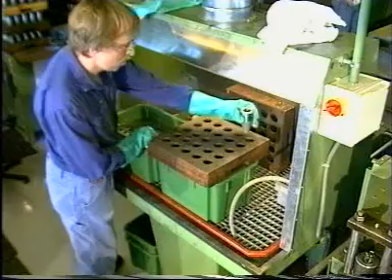All spindle guides are function tested before they are delivered.

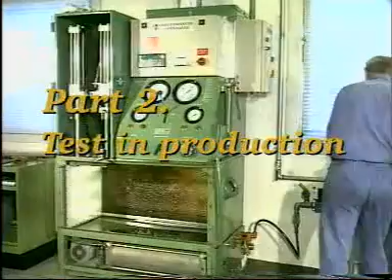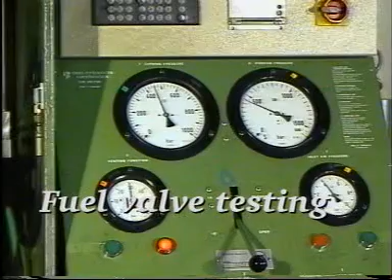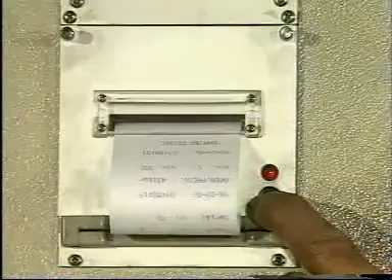All fuel valves are assembled and function tested before leaving the workshop. Overhauled fuel valves or fuel valves taken from stock must be function tested before they are mounted in the cylinder cover. The pressure testing pump is equipped with pressure gauges for displaying opening pressure, working pressure, venting function, and air inlet pressure.

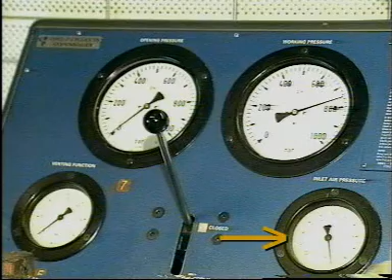Position the fuel valve in the test rig. For guidance on how to operate the pressure testing pump, refer to the supplier's special instructions.

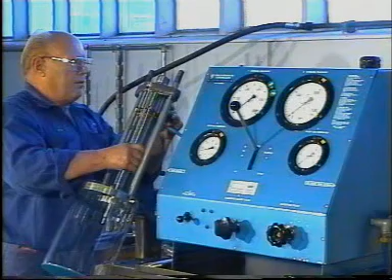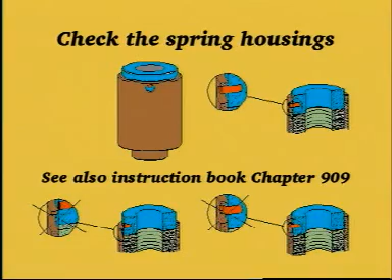To ensure that over-tightening has not taken place, check that the locking and indicating pins have not been bent or broken off. In the event of over-tightening, mount a new spring housing.

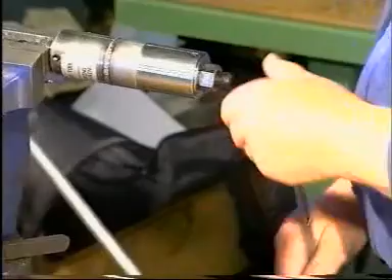A very important element in the correct functioning of the fuel valve, both during testing and in service, is ensuring that the spring housings apply the predetermined tightening force. To ensure that this force is present, a special tool has been designed to check the calibration of the spring housings. We recommend that the calibration of new and especially old spring housings be checked before they are mounted on the engine or on the fuel valve test rig.

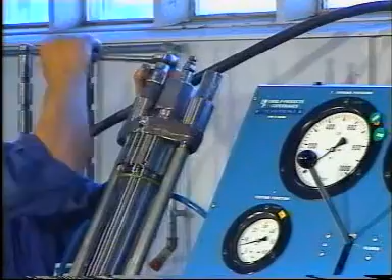Tighten the nuts until the top face of the pressure disc is flush with the top face of the spring housing.

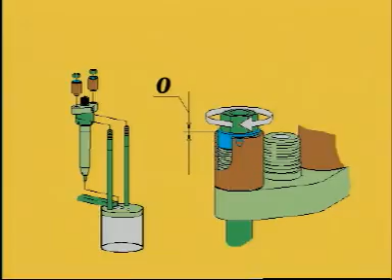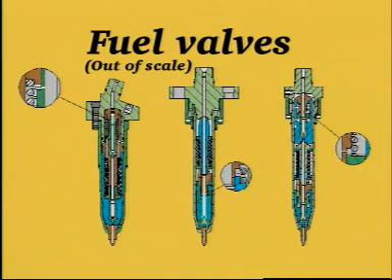Fuel valves are available in 3 different designs depending on engine size. Refer to your instruction book to see which valve is to be used on your engine. The pressure testing procedure is the same for all types of valve.

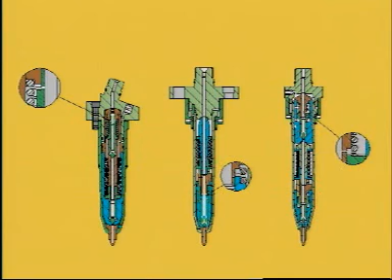Slowly fill the valve by pumping at low pressure until fuel oil, without air bubbles, flows from the fuel oil return pipe. Raise the pressure until it is above the opening pressure.

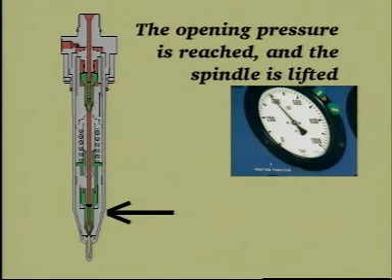Flush the valve for about 5 seconds.

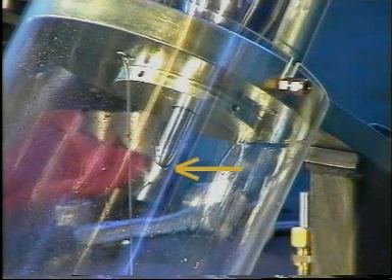There will always be a certain amount of fuel oil flowing from the fuel oil return pipe when the fuel valve is full of fuel oil and pressurized. Fuel oil must not seep from the fuel valve nozzle holes until reaching a pressure of 50 bar below the specified opening pressure. If the fuel oil does seep from the fuel valve nozzles, see Instruction Book, Volume 2, Chapter 909.

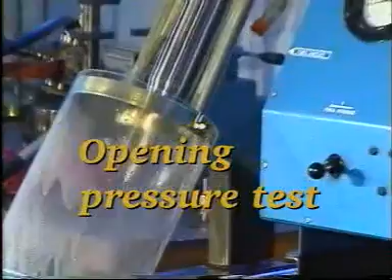Pump 5 to 10 strokes to fully open the valve and to blow out any dirt. Then relieve the pressure.

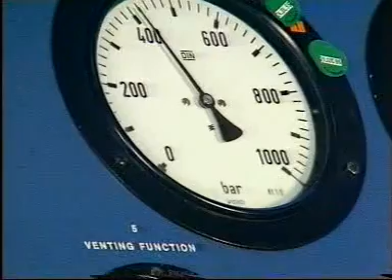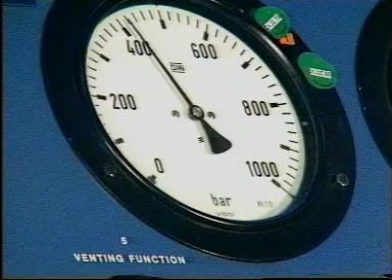Slowly increase the pressure until fuel oil is emitted from all the atomizer holes. Read the actual opening pressure on the pressure gauge marked opening pressure. Compare the actual opening pressure with the pressure specified in the Instruction Book, Volume 2, Chapter 909, and, if necessary, adjust the pressure by inserting or removing discs.

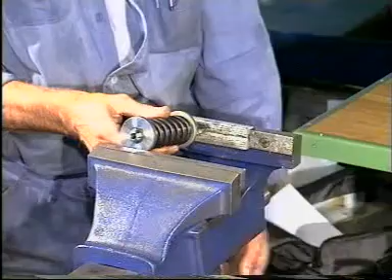Set up the thrust spindle in a bench vise with soft jaws. Compress the spring for the thrust spindle to remove the tension on the circlips, and then remove the circlips.

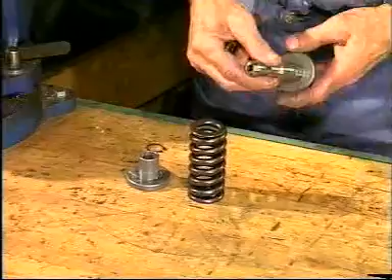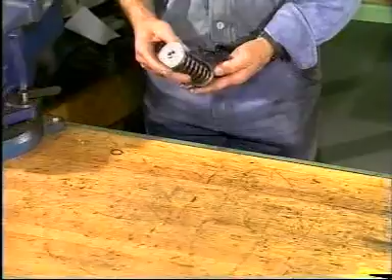Do not insert more than 5 extra discs when adjusting the pressure. The sum of the pressure markings on the extra discs must not exceed 150 bar. The fuel valve must be retested after any adjustment.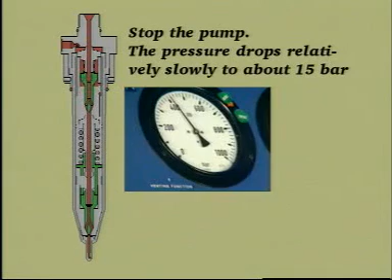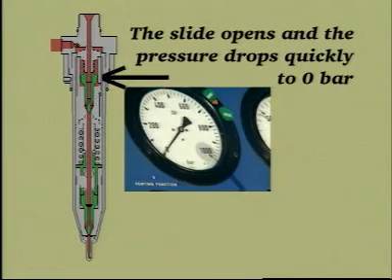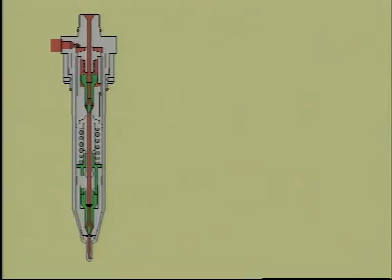If the quick pressure drop cannot be registered, the slide is sticking, or the hole is blocked, disassemble and examine the parts, replace if necessary.

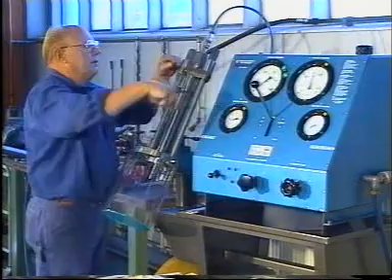Slowly fill the valve by pumping at low pressure until fuel oil, without air bubbles, flows from the fuel oil return pipe. Remove the fuel oil return pipe and block the outlet hole with a gasket and a plug screw.

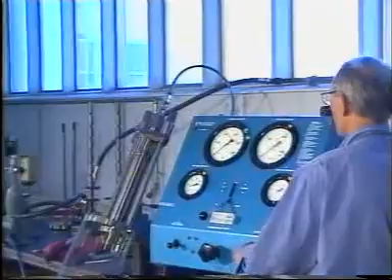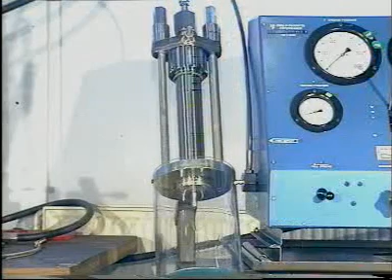Increase the pressure to about 100 bar and move the control handle to the closed position. The pressure should now remain at 100 bar. If oil leaks at the union nut, replace the O-ring seal of the valve head. If oil leaks at the lower end of the valve, replace the O-ring seal on the spindle guide.

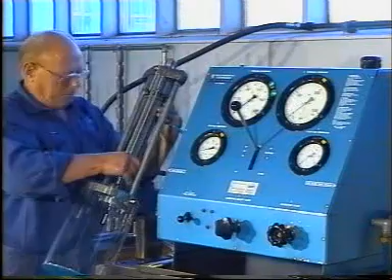After the fuel valve has passed all the tests, it can be mounted in the cylinder cover.

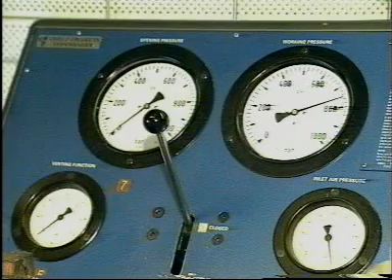The main objective of the normal tests shown in part 3 of this film is to ensure that the valves function at the correct opening pressures and that they seal tightly. As the injection capacity of the engine fuel pump is much greater than that of the pressure testing pump, atomization will be ensured during service, provided that the fuel valve passes the normal tests.

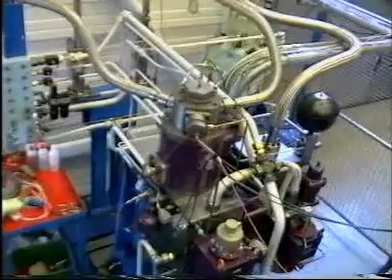The computer-controlled injection system, which is able to simulate the injection into a diesel engine, comprises a high-pressure booster pump, a servo fuel pump unit, and a computer control and monitoring system.

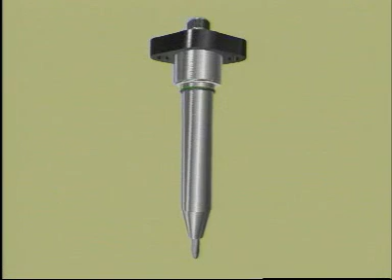Quality controlled spare parts from MAN B&W Copenhagen will ensure continuous and reliable operation.